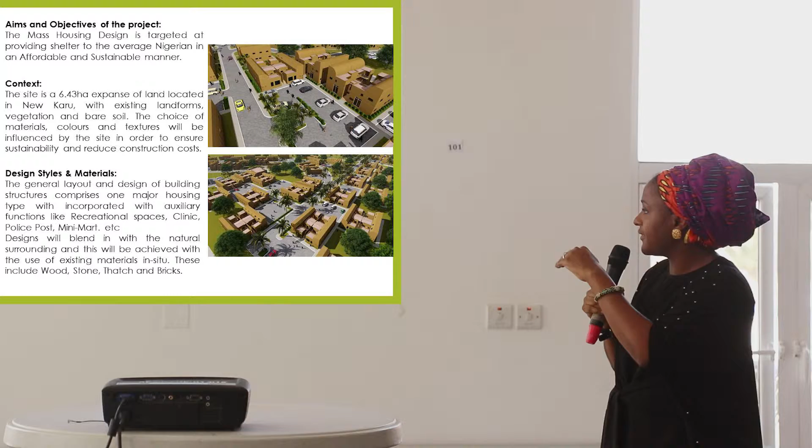Another concept of sustainability is having everything within walking distance. So you have a large 200-unit housing estate, and no shops, no community center. Anybody living there literally has to enter a cab and go somewhere to do something. That's burning fuel, raising the carbon footprint. So we made sure the site was able to encompass all these things without losing money for the clients.

So yes, I want to do all these wonderful things, but at the end of the day, I must be able to maximize my square meters. And you see the layout that we did. From the layout alone, we're able to increase the number of units compared to if you just did a normal grid barracks layout.

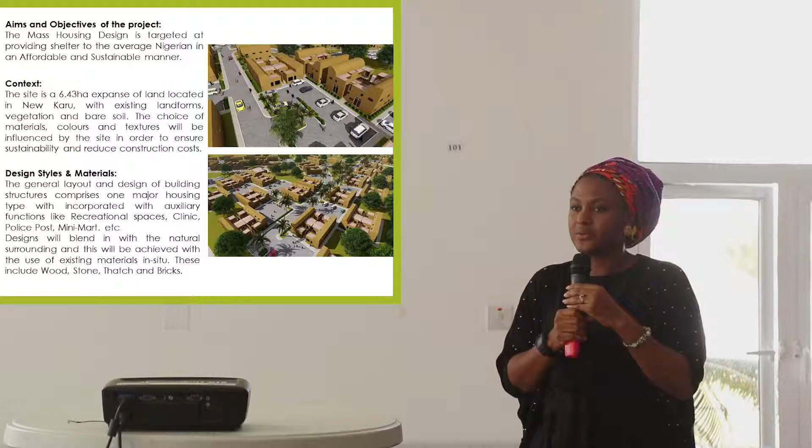Where's the... the site layout? So, let me talk about it. Before he brings that up, you can even see downstairs in our exhibition.

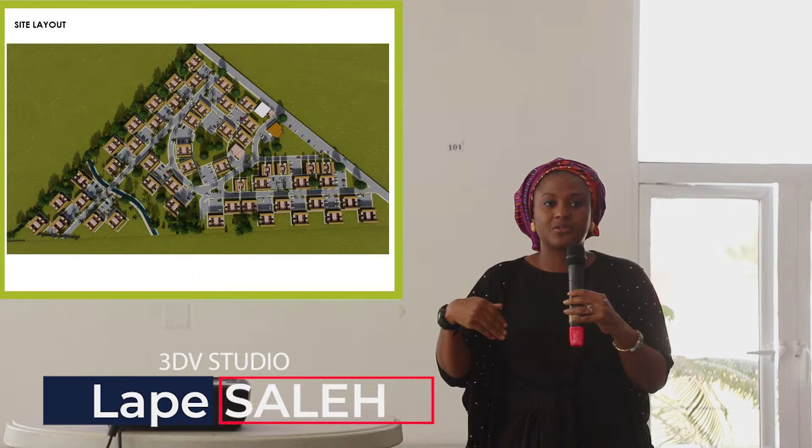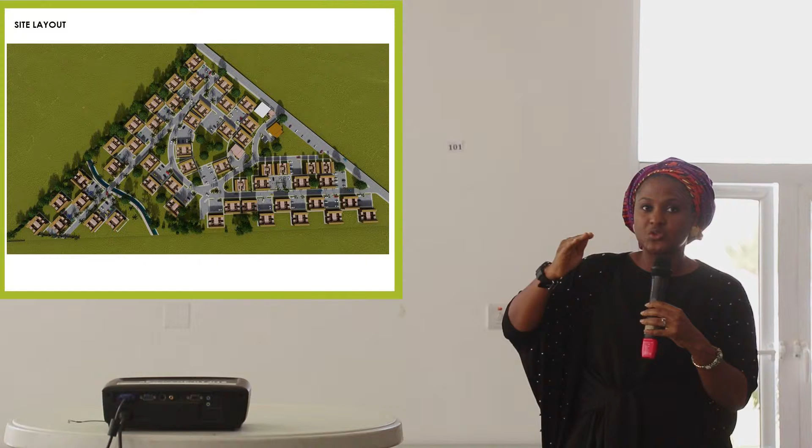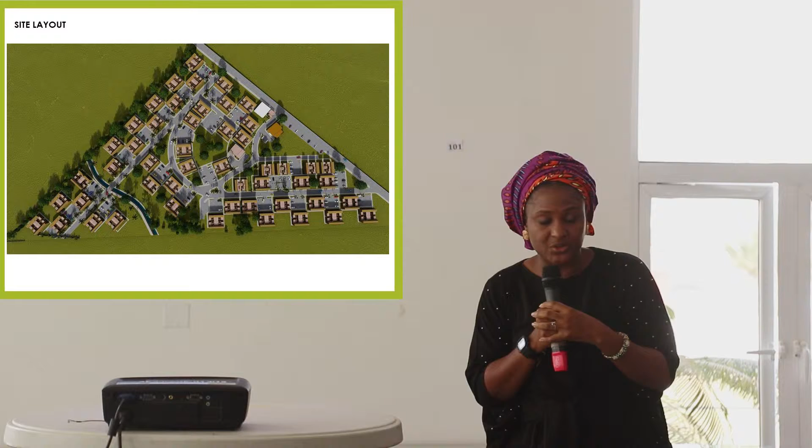The site layout, we tried to make sure we took care of the contours of the site. It was triangular, and we had a large stream running through the site. The first thing we did was make sure our buildings actually follow the contours of the land. We're also able to, using shape and form optimization, align most buildings in a way that reduces the distance to the community center and to the multi-use buildings. So that's another thing we realized.

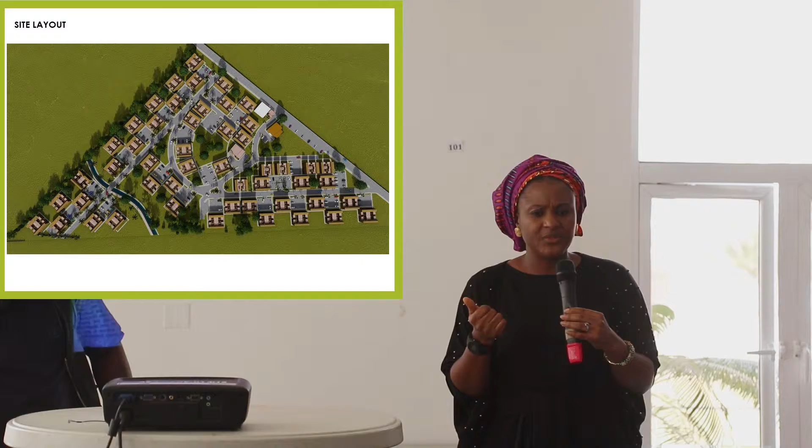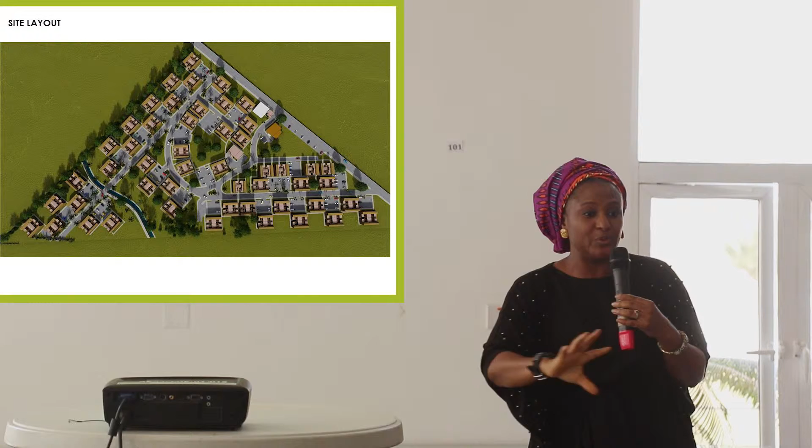When you look at small towns and cities around Nigeria, especially the old ones, you find that on the lower level or along the major roads, you have commercial entities, shops, artisans, people selling small goods, and on the upper floor or just behind, you have their house. It works. Separating that, that whole idea of zoning which our town planners love so much, where you put commercial in one section and push residential across town, means people have to commute, with traffic and all that. It doesn't work for us, and studies show that cities with a combination of commercial and residential are safer, there's more community communication and more ownership and security towards those communities.

So that's one of the things we considered. We have 3 residential types. We have the regular compound, which is a composition of 4 units. You have a unit that is just a building around a courtyard. That courtyard has enough space for planting for that individual. It also has cross ventilation, and within the rooms, we raise the roof.

We raise the roof so that within the room you actually have steps, and you can have an extra bed within the same space. So if a relative comes for 1 week and decides to hang out for 3 months, there's an extra bed within the same space. It's a 2-bedroom, but it can be converted into almost a 4-bedroom. We even gave people the option of actually building up.

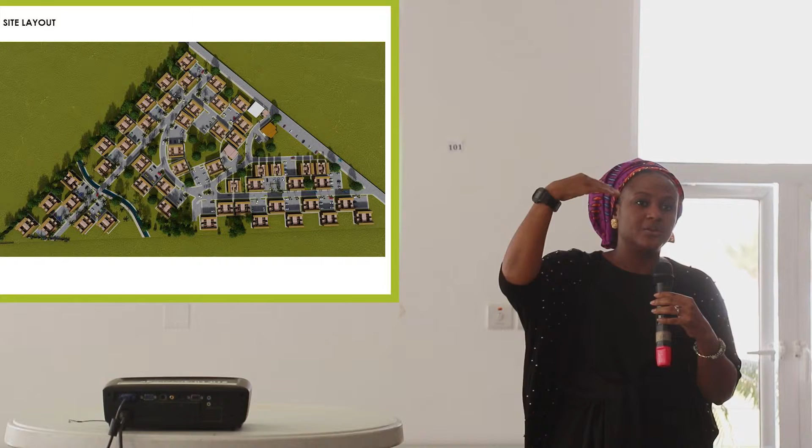The advantage is that we're using compressed earth bricks, taking the sand from the land, adding a bit of cement, molding it, and that's what we use to build it. It's modular, which means if I buy this house from the Key Homes developer, and I've been able to make some money and I'm ready to expand, I can just go up. There's literally an area left that can be used as a staircase, and you can start building your 3rd or 4th bedroom whenever you want. You can keep moving up.

So that was the first thing we did with the first component. That component is not on its own, we connected it to 4 houses. So there are 4 buildings connected together in a compound kind of arrangement. Everyone has their own entrance, but at the same time they're all connected. We created a compound.

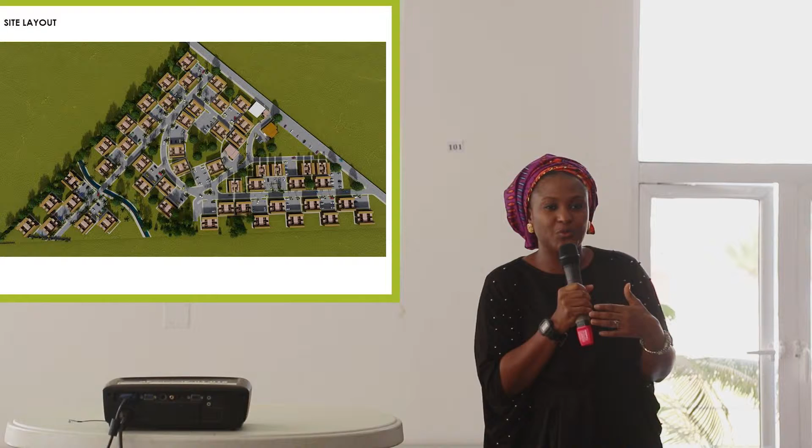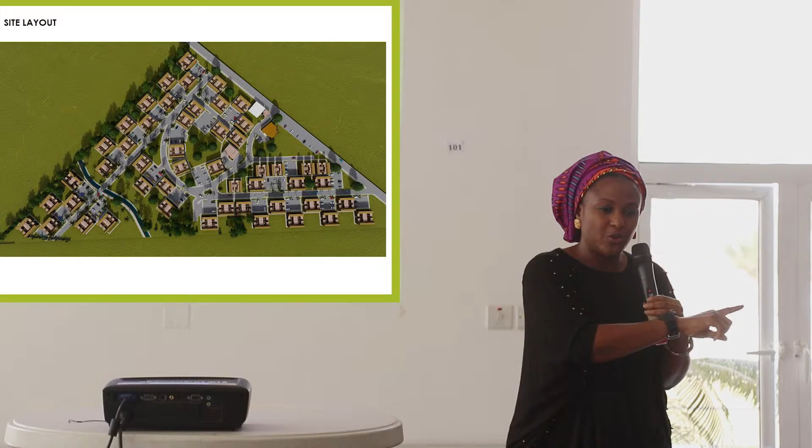Even when you look at people moving into the urban city who don't necessarily belong there, according to our own opinions anyway, they end up in settlements and shanties. You find them in compounds, you hardly find an individual house of its own, and they're very comfortable and happy. My neighbor is one that will take care of my children when I go to work, I'll come back and check in. They help themselves out.

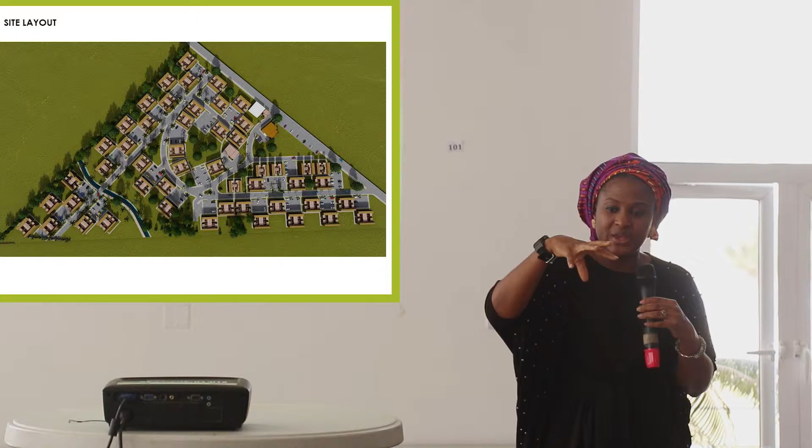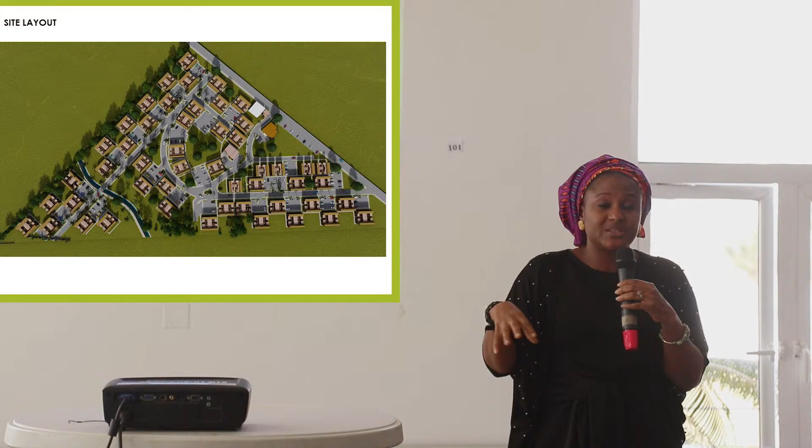So we have our compound with the courtyard, individual entrances, and 4 houses together. Those 4 houses each have that central courtyard, but they're also all attached to a green area. We have a modular arrangement that moves continuously, every single set of 4 compounds has a green area attached to it, meaning children can play safely, and if those people want to go further with farming, they can do that. That's aside from the area we kept separately within the land for farming, so it can be a community-owned farm for that estate.

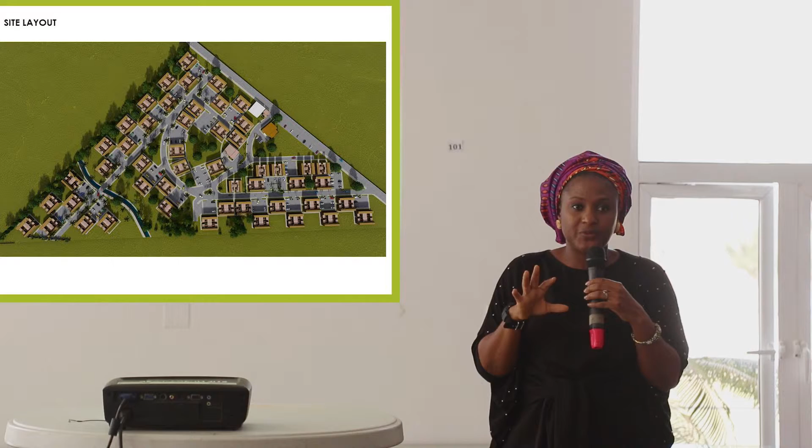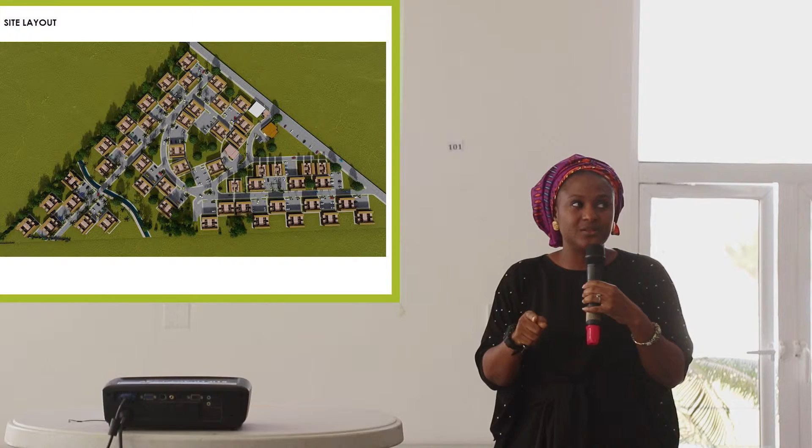Even beyond that, even though our landscape architect advised us on it, we were still able to provide a park which is just for play. So we have a series of green spaces incorporated into design from the very beginning. We had a willing client who saw the vision, and it was very easy to achieve. I really wish I had the visuals here to explain this, but it's coming up.

As I was explaining the second unit, the multi-use unit, on the ground floor we have shops, and on the first floor we have a residential building.

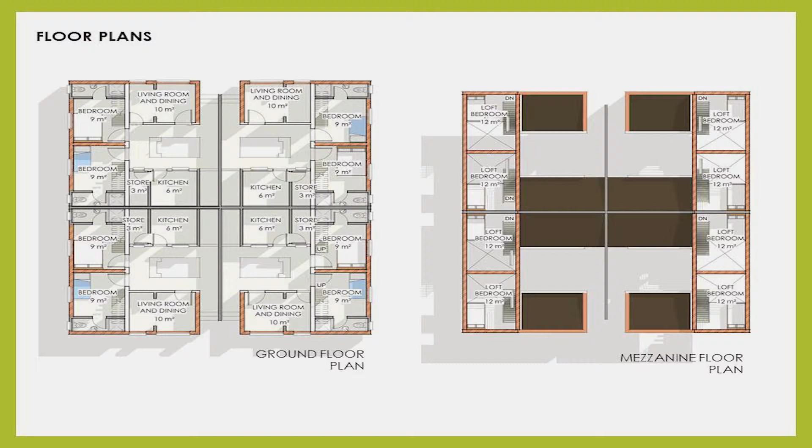Okay, can we go to the residential unit? Take it back. So you have the individual unit, one section here, the entrance — use the mouse, entrance, yes. You come into the space, you have the courtyard there, a living and dining room, a bedroom, store, kitchen, just the basics. And then this is the compound of 4 units put together.

Then you have the multi-use. So even in planning a little city, everything is a micro reflection of a large scale thing. You start with the commercial in the center, then move to the multi-use, and then break down to the residential — that's the same thing we did. Our site being triangular actually helped us do those circles that kept going along the segments, and that is how we achieved it.